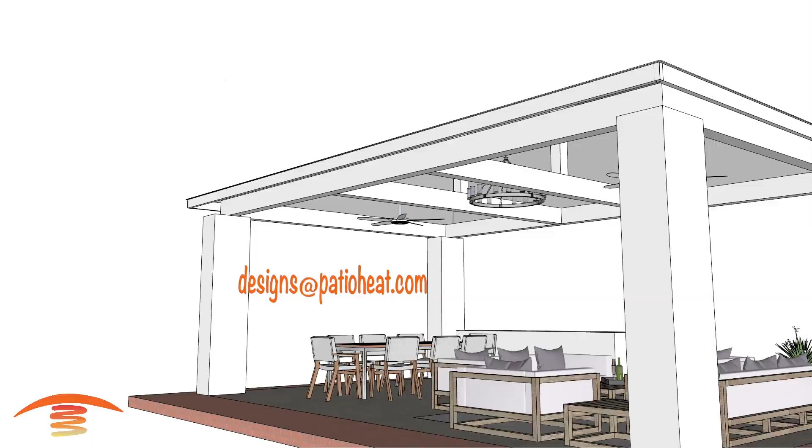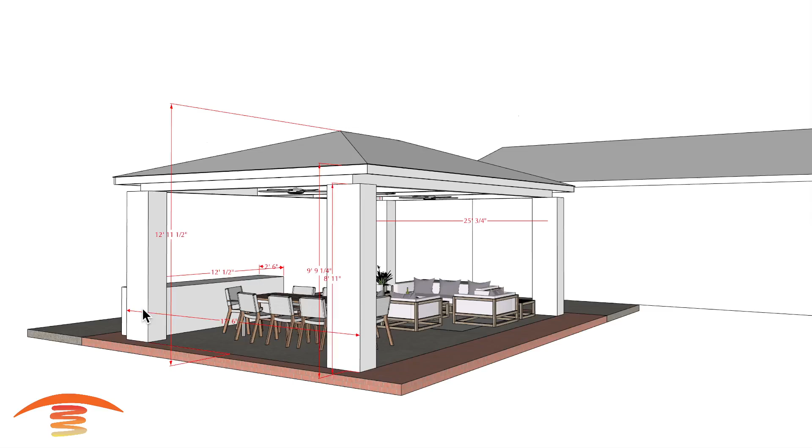Okay, so here we have the standalone structure, residential application. You can see we have two seating areas. There are some fans up here, some light fixtures, and let's go into the overall dimensions. So overall dimensions that I have here are 25 feet by roughly 17.5 feet, and that's the outer edges over here. Also, I have a height here of this, I'll call this a post here, of 8'11", and then a height of 9'9" to the top edge right up here on this cross beam.

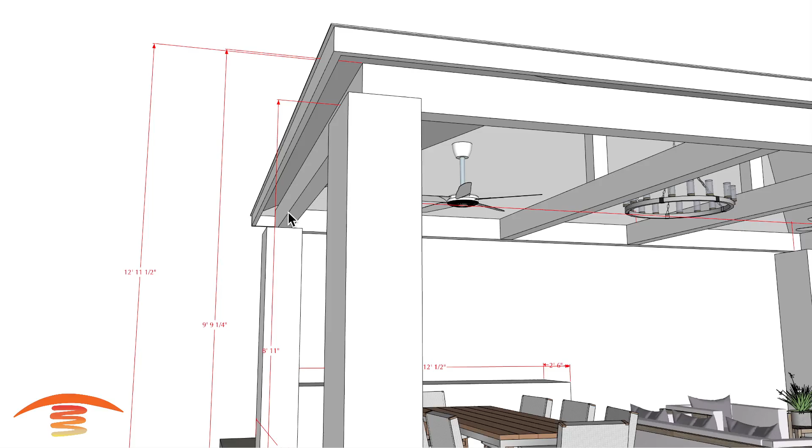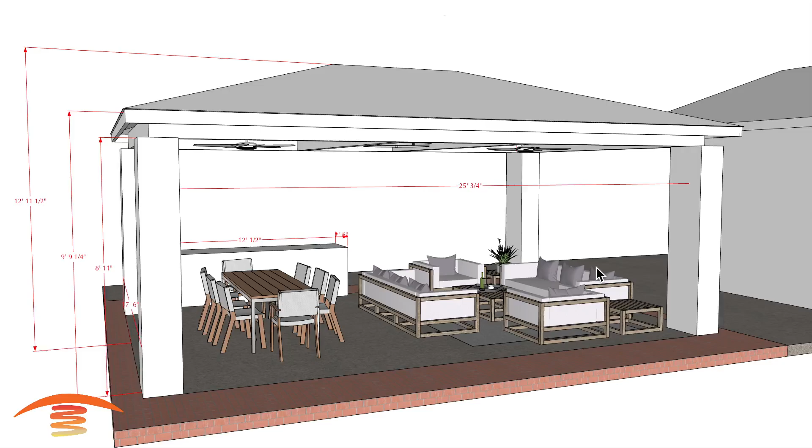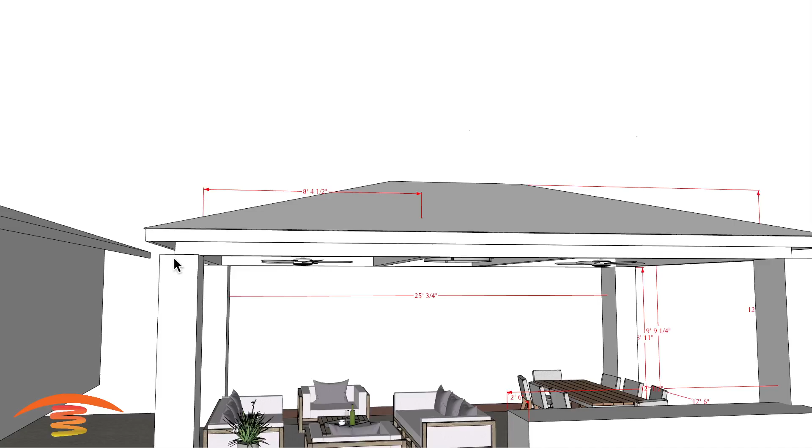So all these cross beams here are going to be roughly about that 9'9" elevation. And then I have a rooftop height of about 13 feet off the finished floor. There is a bar area over here, and I think that's about it as far as dimensions are concerned. Oh, I do want to bring up one other dimension here, and I'll show you why in just a minute. Here I have this distance between this inside edge of the post here to the inside of this beam here, and I have that at 8'4.5". Now this is going to be a very specific piece of information when we start to look at what we can do here to heat the area.

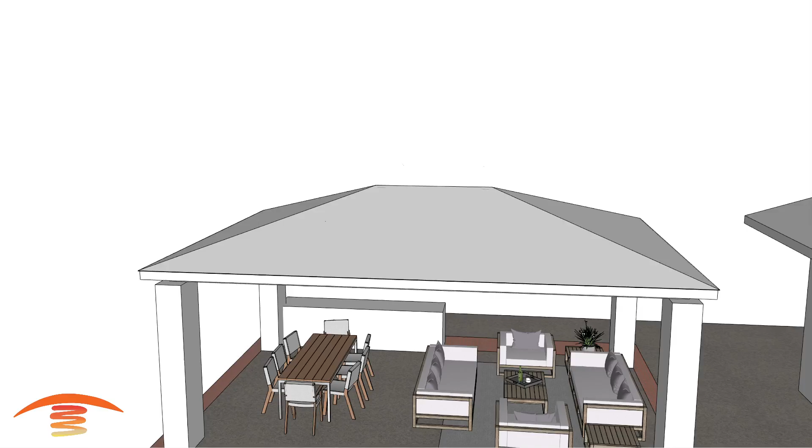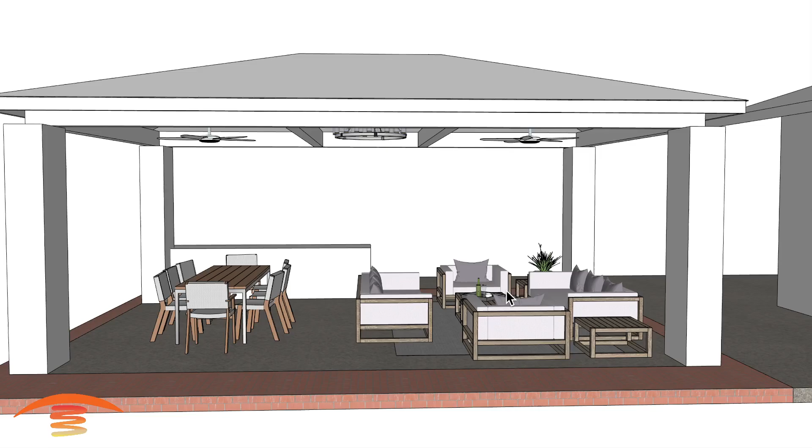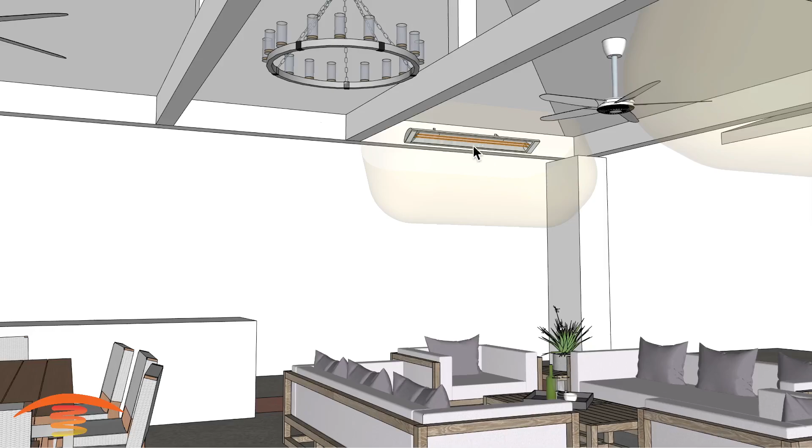Let's go ahead and turn that off now, and we're going to just talk about heating up this one side over here. This particular client had asked for just 2 units and to specifically heat up the seating position here on the right. You can see also that I have the seating positions here just about centrally located. It might be pushed over just slightly, but in any case, about centrally located here to the backside. And now let's go ahead and look at what we can do. First of all, I'm going to show the 6,000 watt CD model. So this has got 2 elements on it, 6,000 watt, 240 volts at 25 amps a piece.

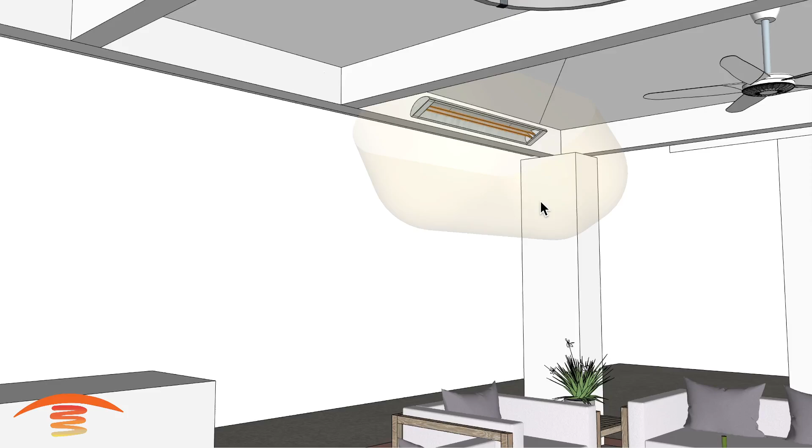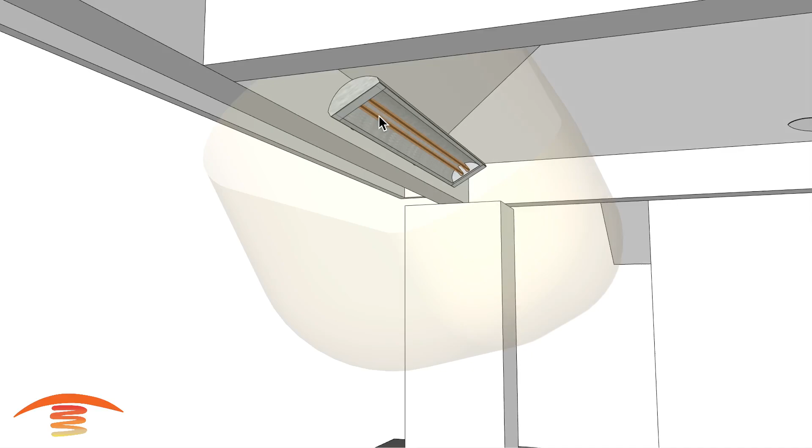And what I did here is I placed, first of all, the clearance area, and this is why I brought up that dimension that was kind of important here. This heater itself is not quite centered within the span from this post here to the inside edge here. Now we could move it over slightly, but what I wanted to show is that you need to make sure that this has got a minimum of 18 inches from this edge here to the edge of the heater itself, and the same is applied on this side here as well. The other thing too is that the clearance above the heater when mounted on a vertical surface like this has to be a minimum of 12 inches.

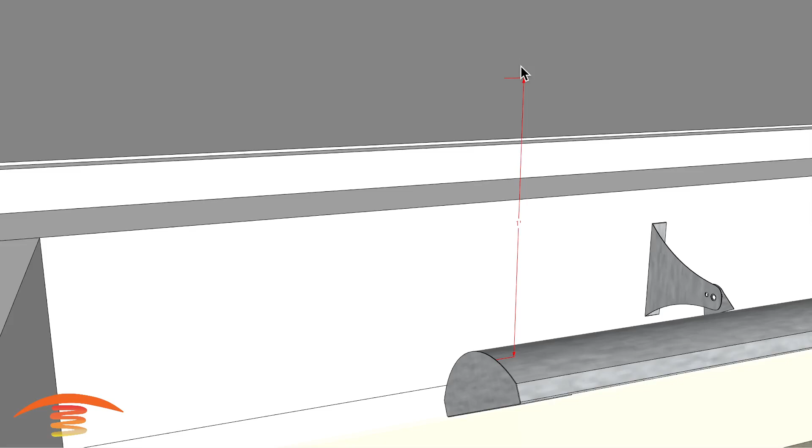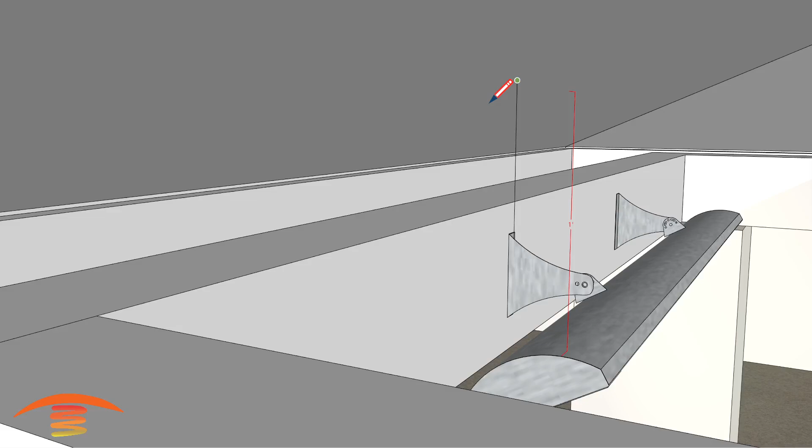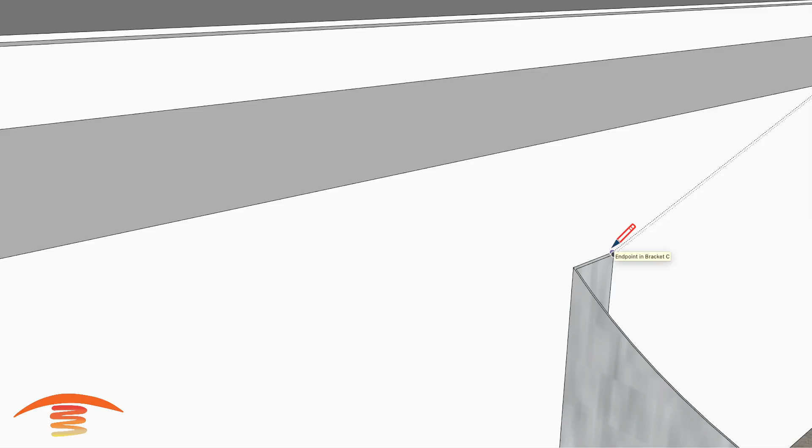And so let me go ahead and just turn on that 12-inch height here. Now you can see that what I have remaining is just a couple of inches of height above. So this is 12 inches from the top edge of the heater here to the clearance area. And again, you can see that we just have a few more inches here, maybe 4, 6, but it's very important that you measure off what is true. If I was to show you the mounting space of this bracket here, and I just went straight up here, that is 10 3/4 of an inch. Let me double check that I hit it right. I actually didn't, so let me go back over here and go from here up to the top ceiling area, and so that's actually 10 1/4 of an inch. If you don't have 10 1/4 of an inch, then the heater isn't going to fit here properly.

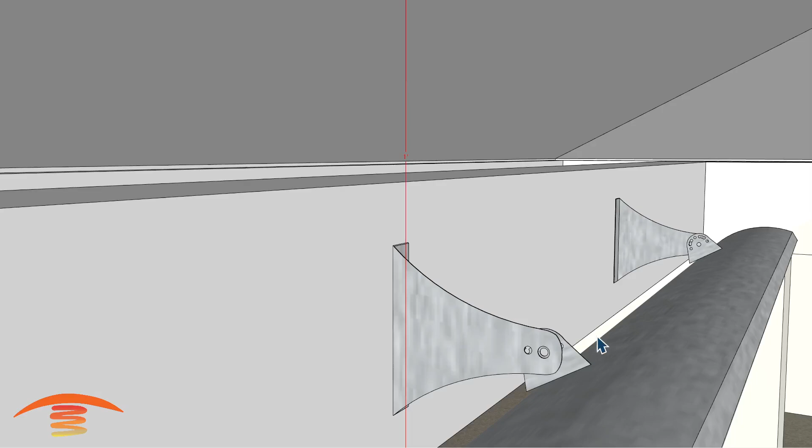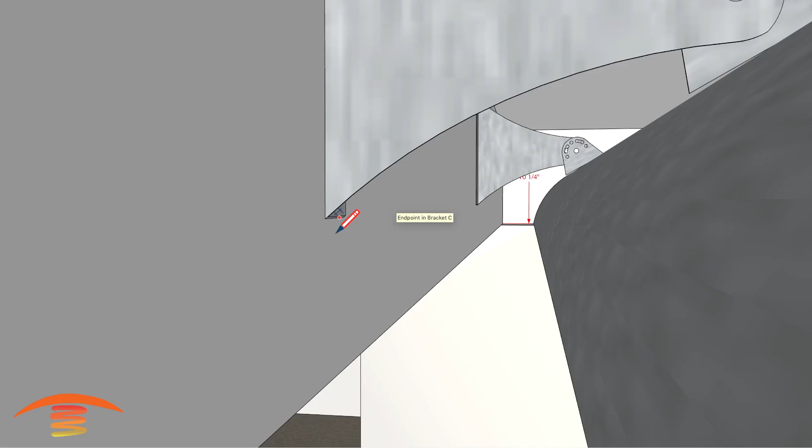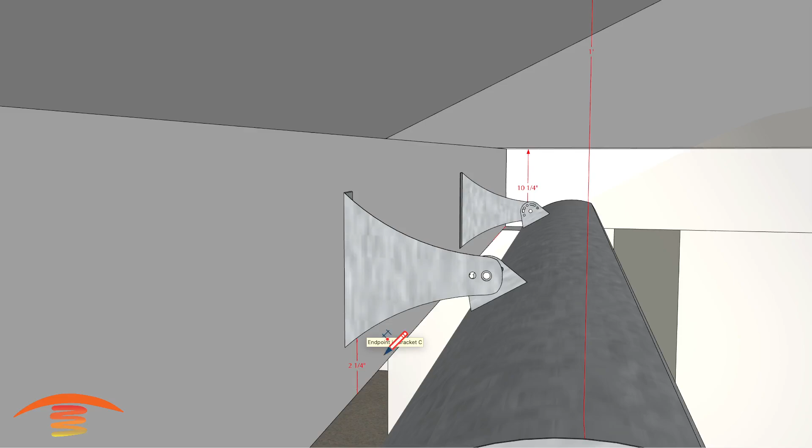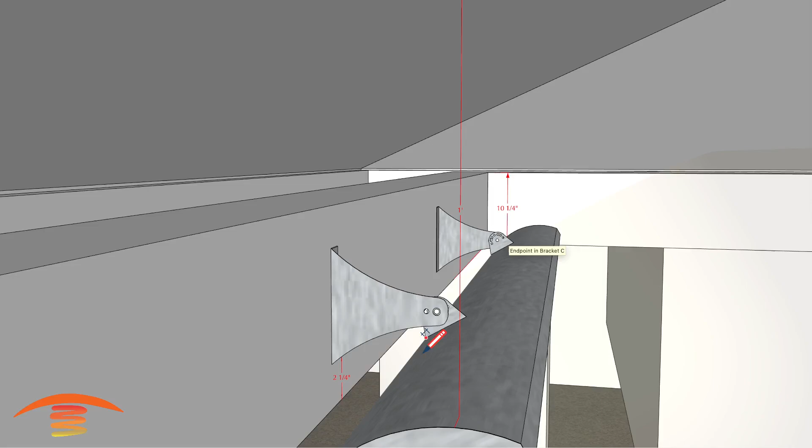Now, obviously, you can see what I have as far as the height of this beam coming across, and let me grab it over here to here. I have that at 10 1/4 of an inch. So obviously, there is some space that you can move this down. Roughly I have it at about 2.25 inches that you can actually move this bracket down. So that height could change. You have 2 inches extra to go. So again, it comes down to this point here, 12 inches of clearance above, but that 10 1/4 is just to show that if you had 10 1/4 inches to the top, then this heater will work if it's truly there.

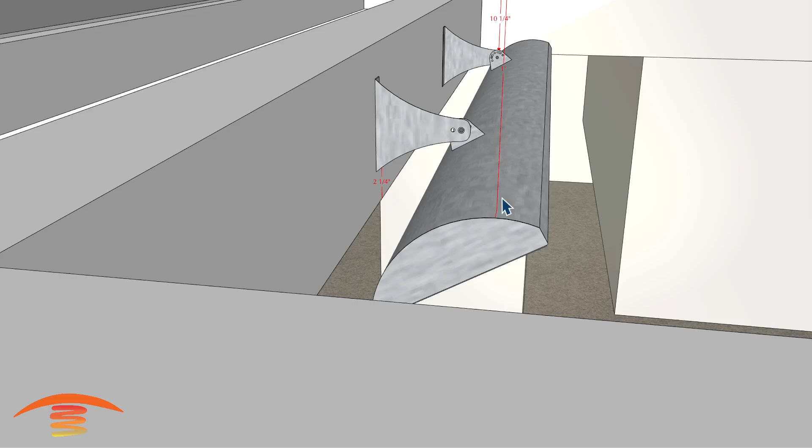The other thing I need to mention is that the angle of the heater itself is at 30 degrees. So if you change that, then obviously the height of this top portion of the heater is going to go up a little higher, so you will need to modify that as well. But in any case, what I want to show is the footprint of heat, and I'm going to go ahead and turn that on, and I'm going to turn the clearance areas off here. I'm also going to take off the rooftop here so we can take a good look at what that heat coverage is going to look like.

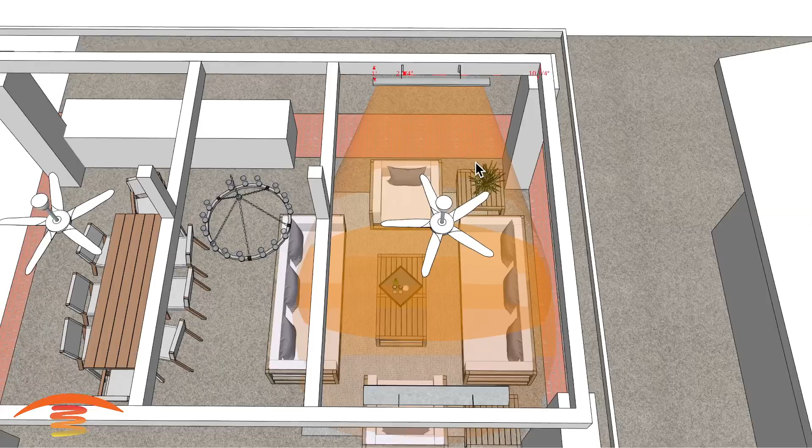And with the seating position like I have it, it is really good for most of the seating positions. The only thing I would say is that right here, your upper torso is not in the ideal amount of heat. And just to note that this is infrared light waves.

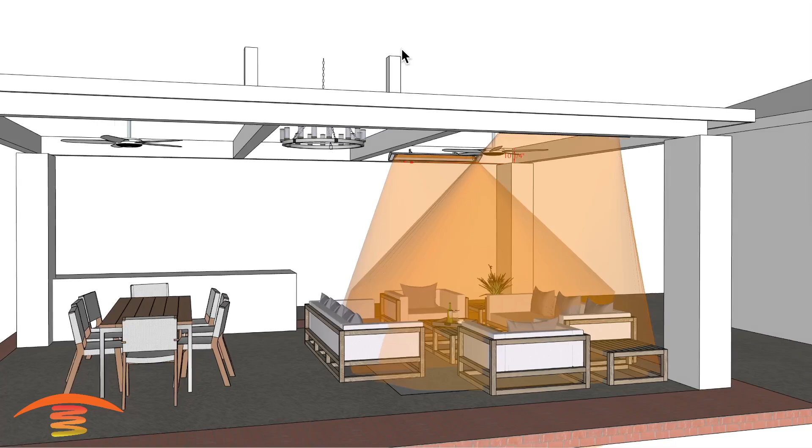Infrared light waves are kind of like the sun. So if I cast the sun out here, you can see that there's the sun hitting this structure. I can put the rooftop back on here. But if you were standing in the shadow of the structure, you would not feel the sunlight of the sun itself, and you would not feel the warmth of the infrared light waves that come from the sun. And the same is true here.

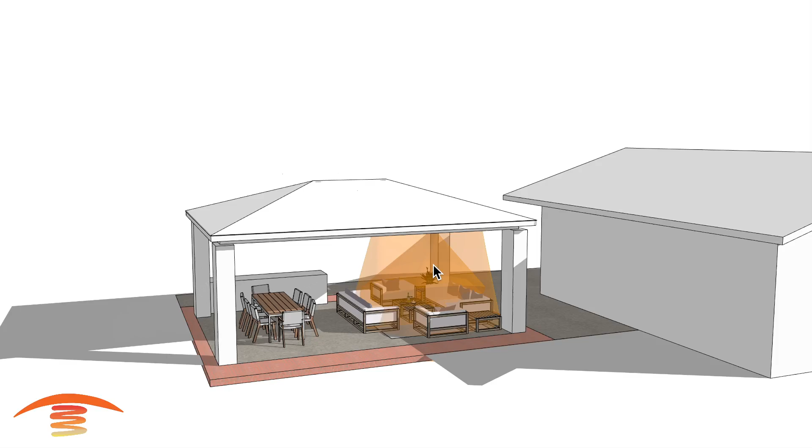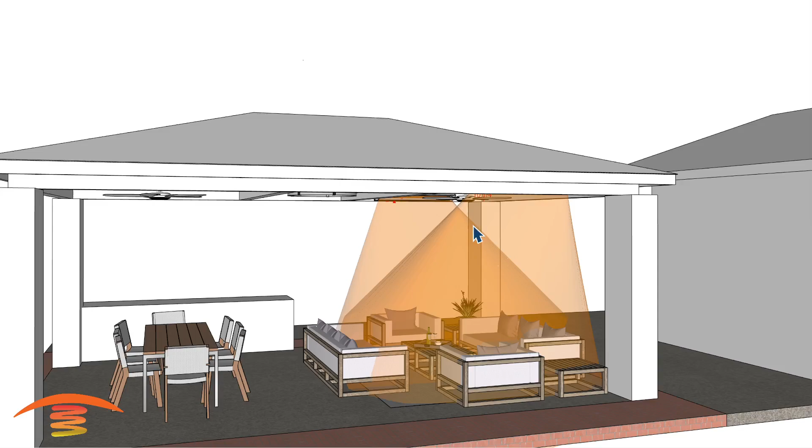I'm going to go ahead and turn off the shadow here and just talk about this: if you're not in that light wave itself, you're not going to feel the warmth. Infrared does not heat air. Infrared heats mass: tables, chairs, floors and the human body. If you're not in that ray itself, you're not going to feel it.

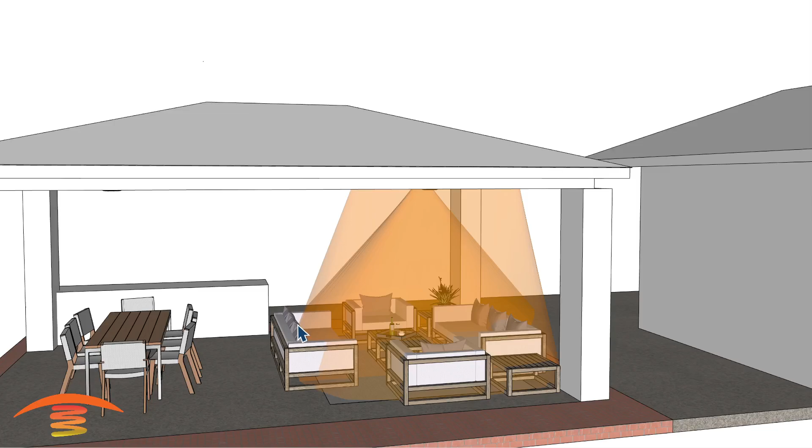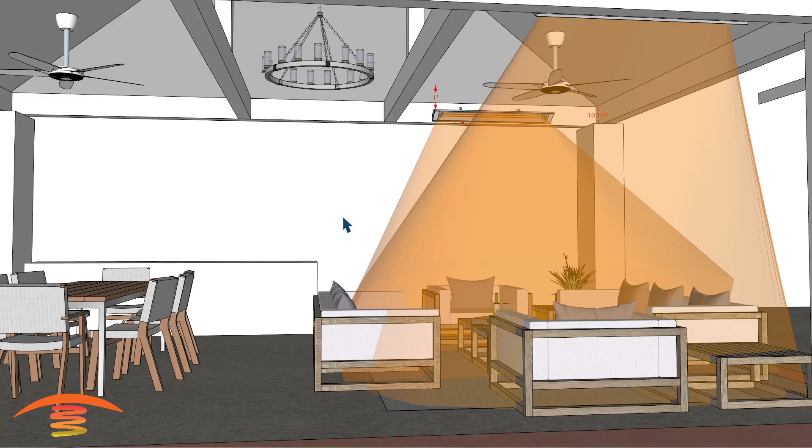So the other thing too is this footprint that you see here. It's roughly about 10 by 12, so 12 foot this direction, and 10 foot from this point here to this point here. That's the footprint of heat that you'll get. Now, infrared does bend and stretch and go further, but this is the ideal footprint. So yes, you will feel some of the warmth over here on your upper torso, but it won't be as ideal. And we have to maintain that 18 inches of clearance over here, and that's part of the issue.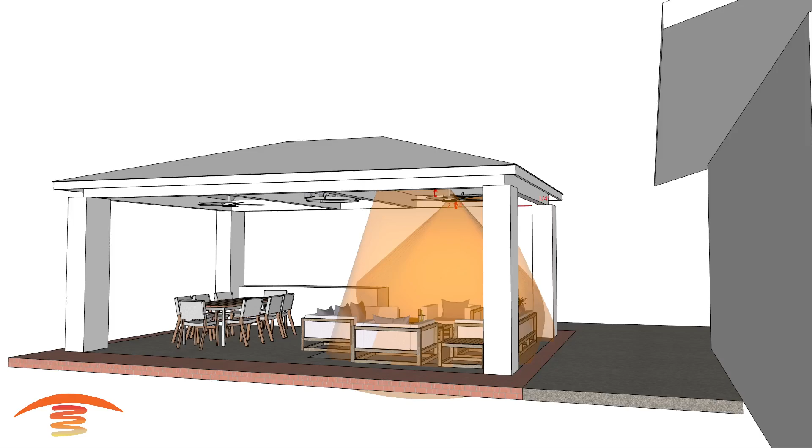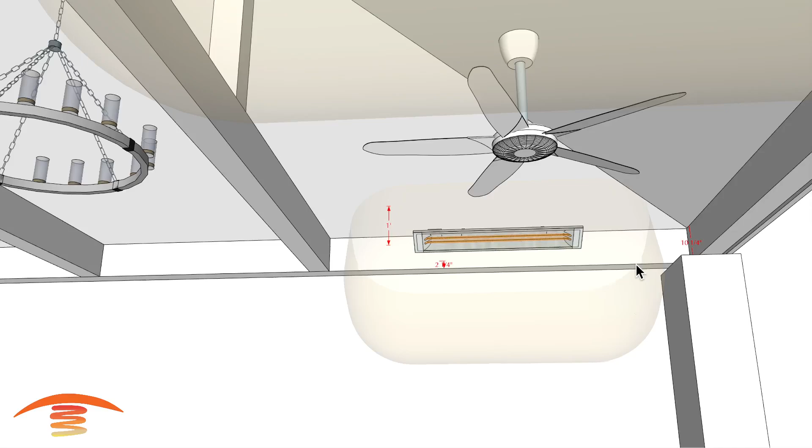Now, if we place the heaters over here, that's something that we could do. I'll do that in just a minute. But I also want to show another option of placing the 5200 watt units. These are shorter than the others, and I have them centered within the span from here to here. I'm going to turn off the ray for a minute and put the clearance areas on. You can see that the clearance areas here are not as restrictive.

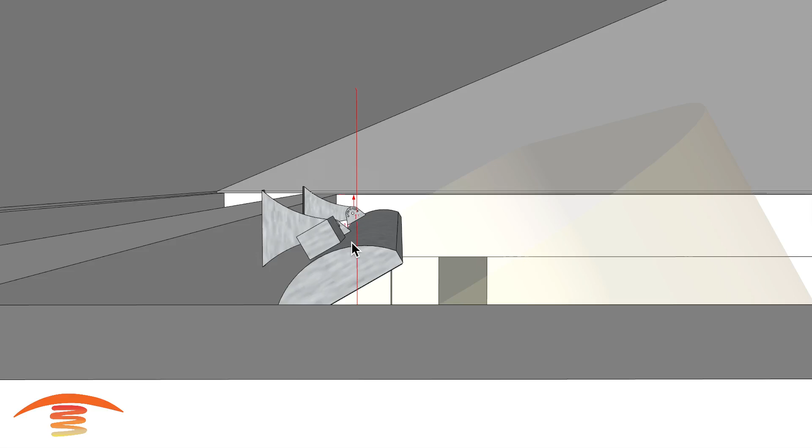And also, I placed this heater so that it is physically 12 inches from the top of the heater to the sloped ceiling over here. Obviously you'd move this down, but I wanted to show that it can go up a little higher than the other one. If I show the other one here, you can see it's a different height, but obviously you'd want to move the heater down.

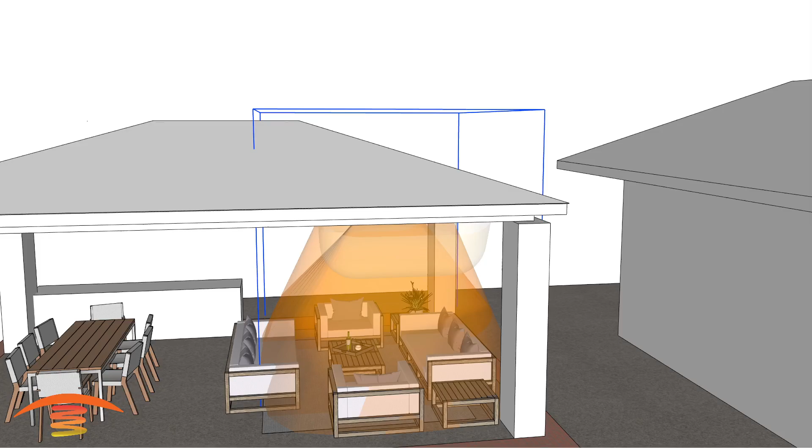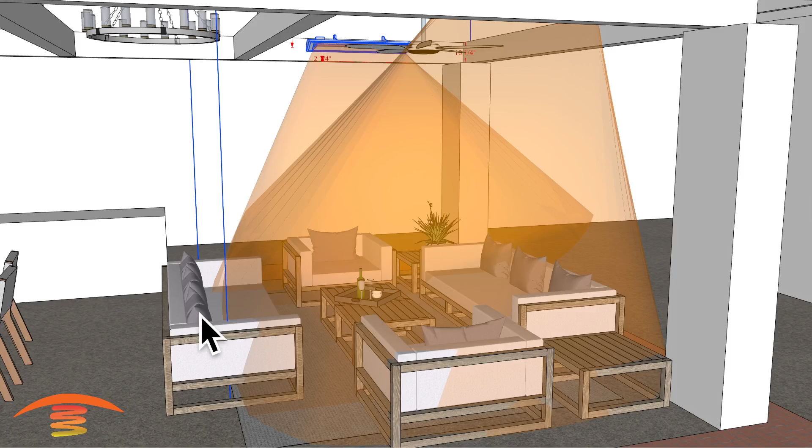I'm going to turn this off and look at the footprint of heat. Turn off the clearance. And I'm also going to take the rooftop off again and take a look at that. You can see that the only difference really is that the coverage over here is slightly less. It's about 9 feet of throw left to right. So you're going to be missing a little bit more of this area with that particular unit. And obviously I have it further away from this edge here, so it's centered here.

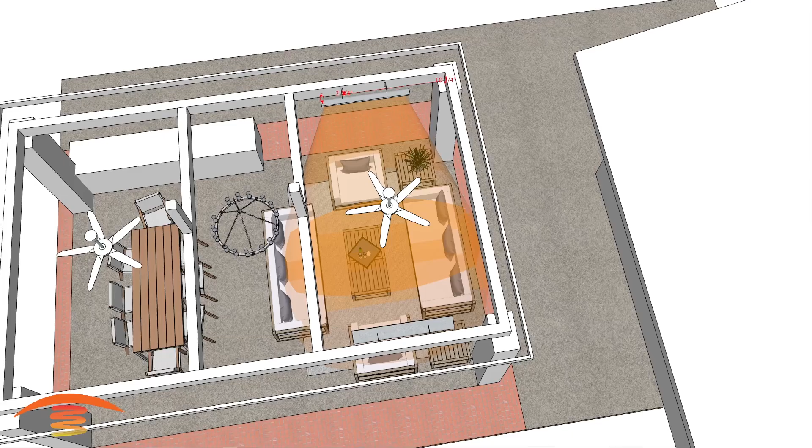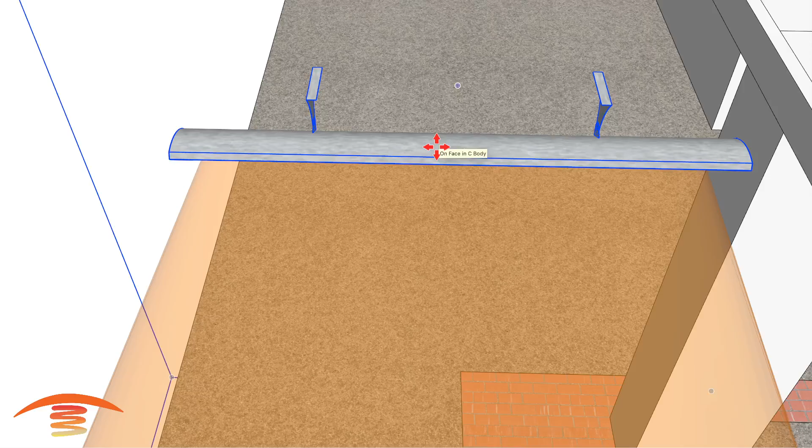So that would work out okay, but I would probably prefer the 6,000 watt units more. Now, I'm going to turn this off. Let me grab another 6,000 watt unit and place it here for a second, and switch it around. We're going to move it up here to get an idea of what that would look like. I'm also going to move this to the center of the patio structure itself. I'll place it right here in the center, and you can see that there is another issue here, and this is why it might not work out.

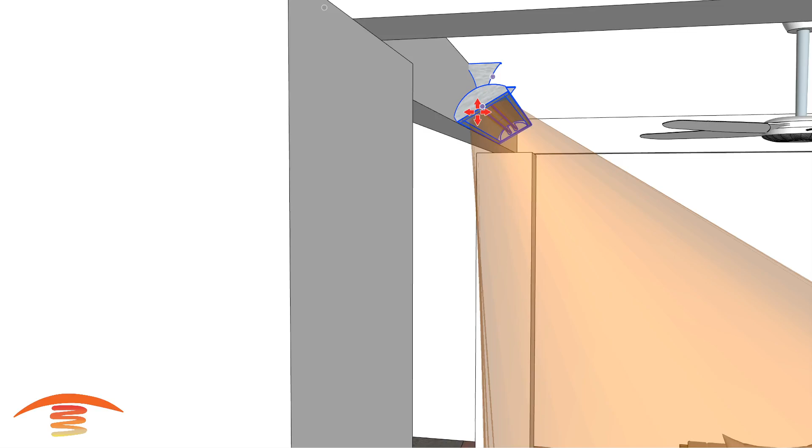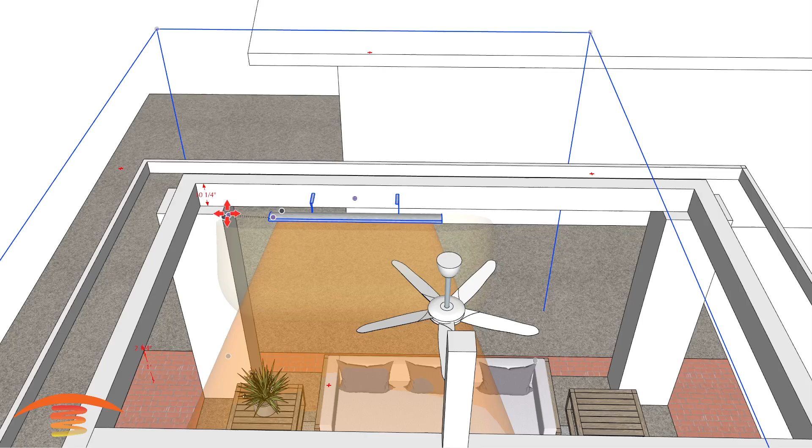I'm going to place it right up to the edge, move it out 6 inches, and turn on the clearances below the heater, and you can see now we're penetrating this fan here in the middle, and we really don't have much room to move the unit left or right. But let's say we go 18 inches to that particular edge, this is the edge I'm talking about. The footprint of heat is decent. You would receive that heat over here, and here would be just as fine.

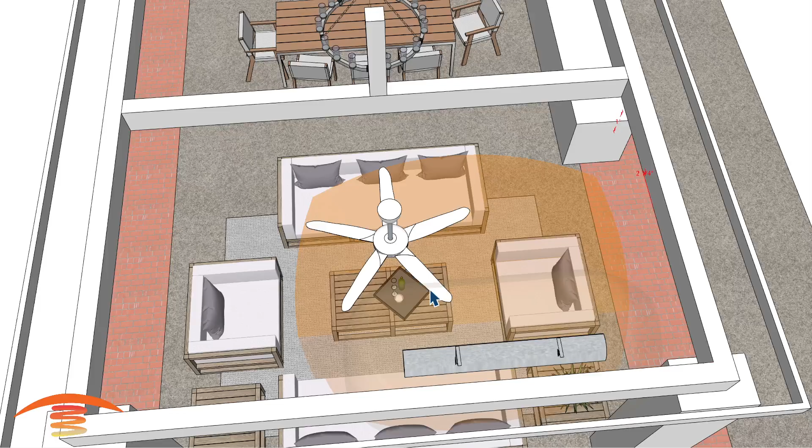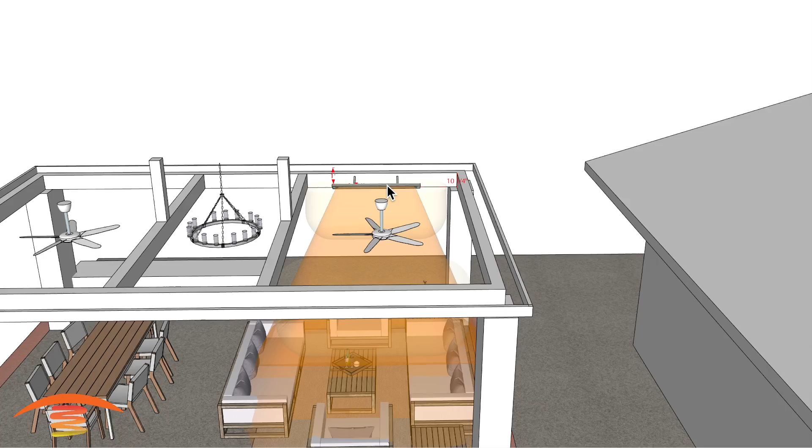But the main problem is that we're not meeting the clearance to the fan. The fan would have to go up approximately 12 inches, and that would probably not be available. So that's why I'm not placing a heater over here. So let's take that out and go back to my preferred option, which is the two 6,000 watt units mounted here 18 inches away from this beam and at a 30-degree angle. I think this would be the most ideal for this application.